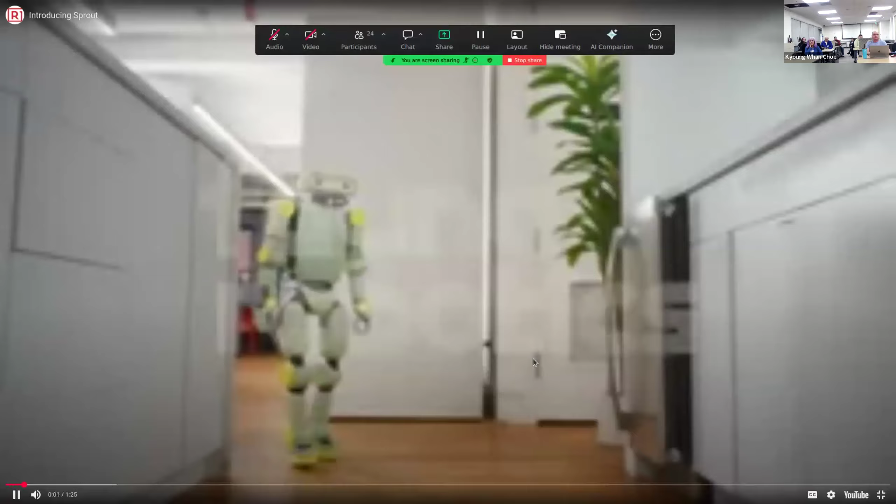It's running real slow and real low res. The robot walks slowly, and it is a low res robot.

But this is Sprout, this is Sprout, okay? You can get one of these. They say they're on sale as of yesterday for $50K. So there you go. But what do they do?

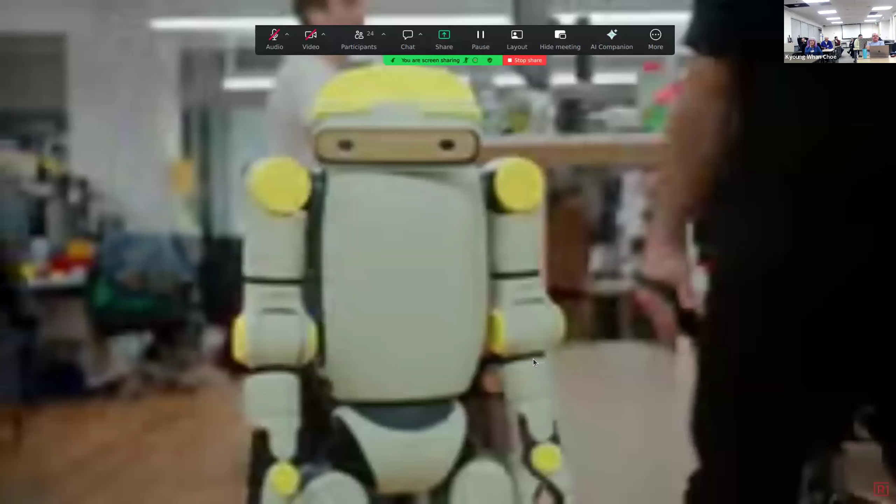Looks like a toy. Yeah. It holds your stickers.

They specifically said that they're setting it up for research labs and things like that. They also talk about the home, and they talked about it, which was kind of funny. I read an article where they were talking about hotels, and in particular, it delivering toothbrushes for some reason. But anyways, there's that, okay, let's move on.

Let's see, we're still - what is it, the Wuji hand? Is that the question? Do you guys see the Wuji hand? Are you sharing your screen? I will share it here in a second, let me bring it up, and then I can go here and share this.

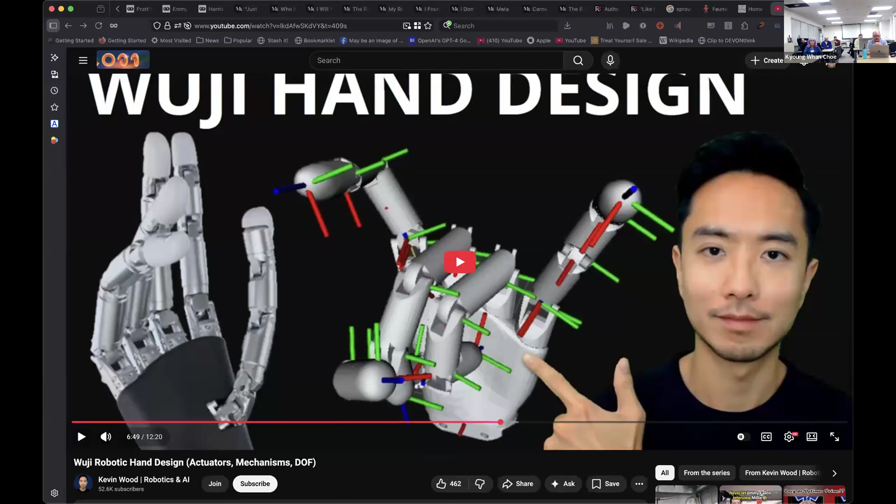So this has a worm gear here, and then you have... this is a new hand that was announced, and all the frames here show the different degrees of freedom. You can go ahead and actuate it here. Let me see if I can get a better view. This is their model of it.

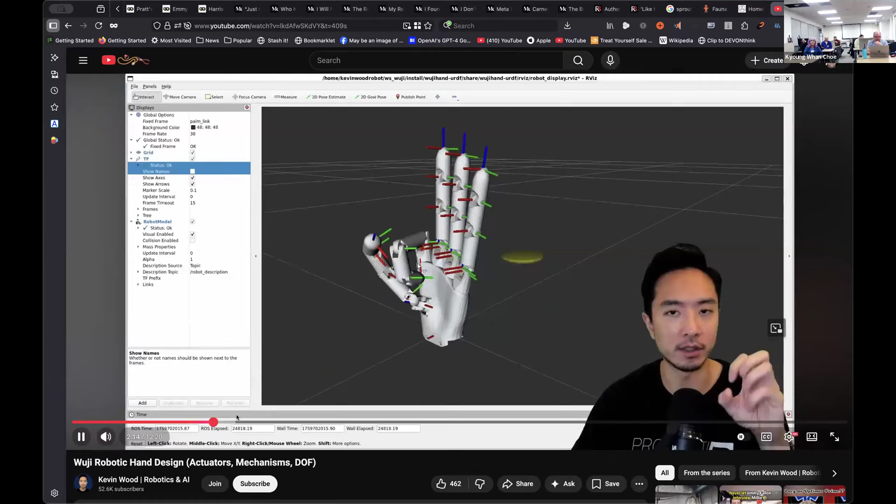This nice hand basically has a bunch of embedded motors. It's from a company that makes miniature embedded motors. And there's this 4-bar linkage here.

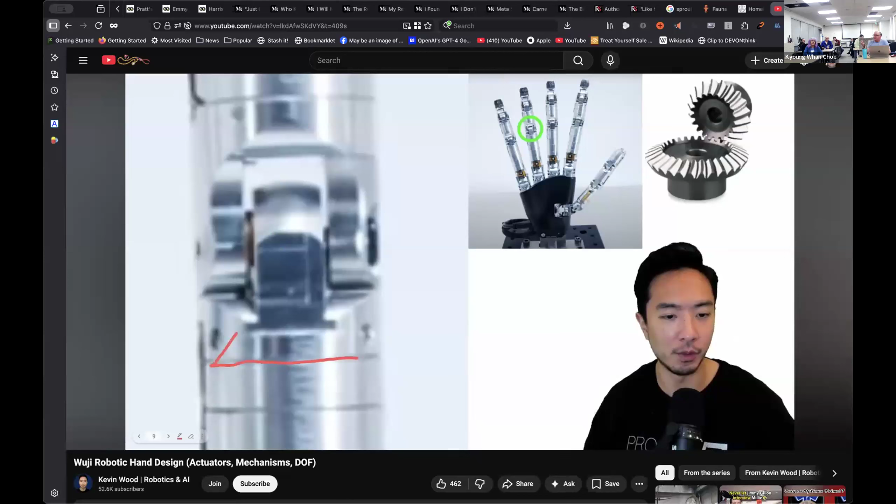So this is how it does it, which I'll show you a little bit. What's nice about it is it has, I think, 20 or 22 degrees of freedom. It actually has more for the joints covering the fingers than a human hand does, because in our hands some of our joints are coupled with tendons, and they have independent control of every joint, and can also do the splay individually of each finger.

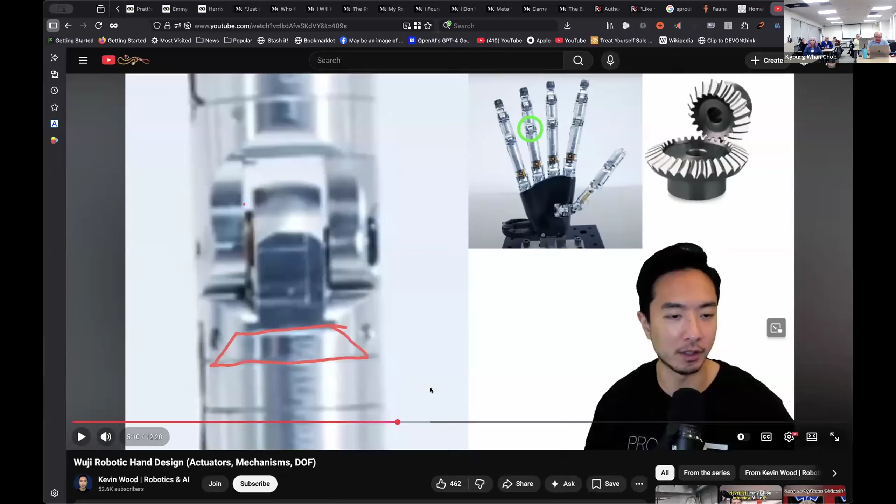So the clever thing is, one of the things they show is you can grip something heavy and then lift it up.

People are trying to discern exactly what the mechanism is in this, and the best conclusion I've seen is that basically they have a gear motor for each joint of the finger. The best guess is that they're doing a worm gear right at the joint, so basically the backside of the center post likely has a worm gear.

I bet it's got a hell of a grip. Yeah, so with the worm gear...

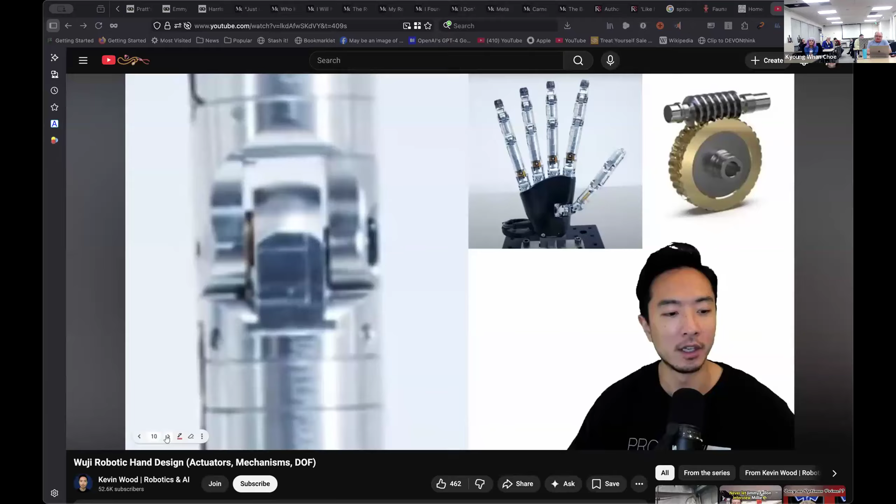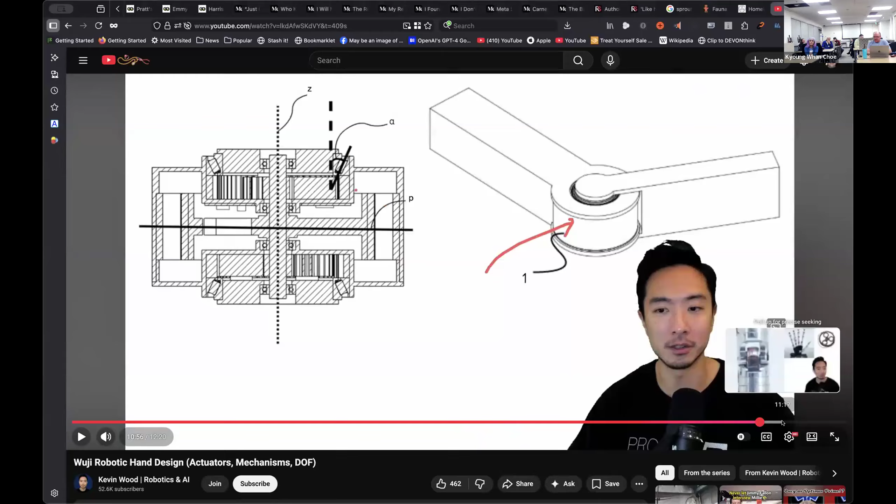Well, that's the thing, I don't think it's necessarily... they talk about it being relatively strong, but it's really strong once it has gripped something. Because it's using worm gears, that doesn't necessarily mean the fingers are strong enough to do that grip. In a different video they show it gripping a weight and picking it up - wrapping the fingers around it, they probably don't have a whole lot of strength, but once those fingers are in position, you can lift it up because the worm gears lock it in.

So I have a completely different mechanism, like a tendon-based mechanism, which is what I'm really interested in right now for humanoid hands. But I'm kind of tempted to try to build a cheap version of this design.

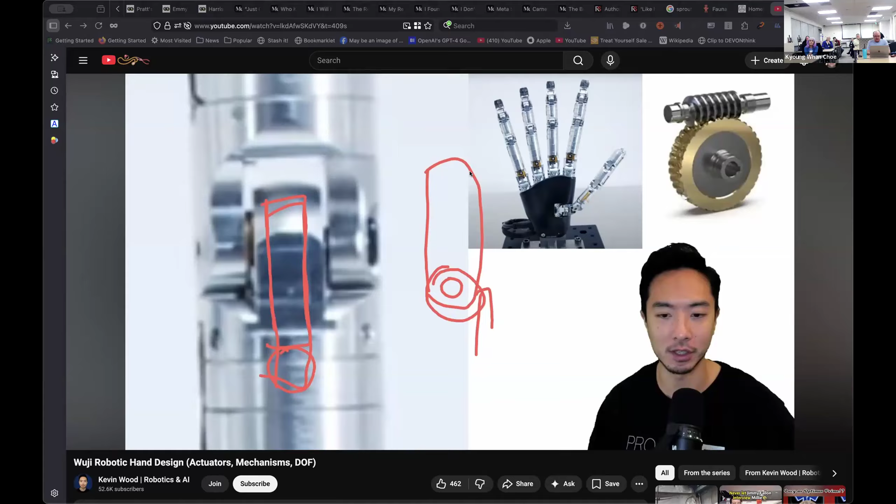Can you put that link in the chat, Stephen? I thought I did, but maybe not. Oh, I just shared so far. As soon as I stop sharing, I will put that in there.

Any other industry news?

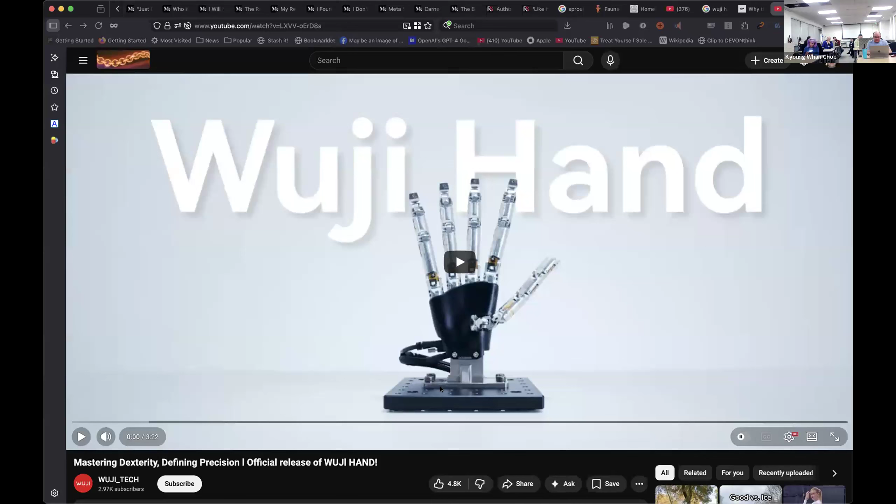ROS By-The-Bay is tomorrow night for anybody that also wants to go to that. We need to infiltrate that group, I want a homebrew presence. I went to ROS once, and it's all the people that used to come regularly here. Well, they've got our spot at Google. I remember when we were at Google. Those days are gone, but anyways, we can sneak back in there. When is it, Nathan? Tomorrow night at the Google facility. More robot stuff, did they do that? Did they do free pizza and beer, by the way?

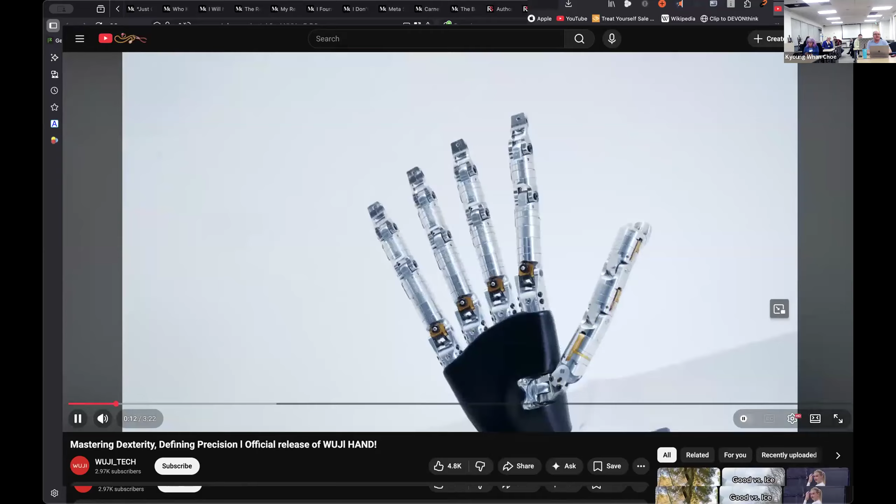Hey Cam, you're still sharing that video. I found the official video, that's Steven.

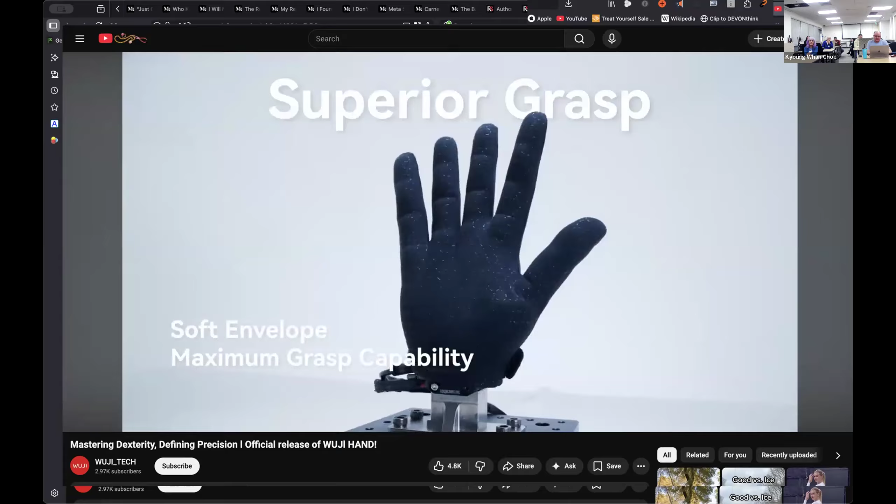It's a nice hand. I think I saw that they're quoting $5,500 for it. That's a lot better than I thought - I thought you said 50,000, but it's one less zero, 5,500. That's reasonable, for 10K you could have two hands.

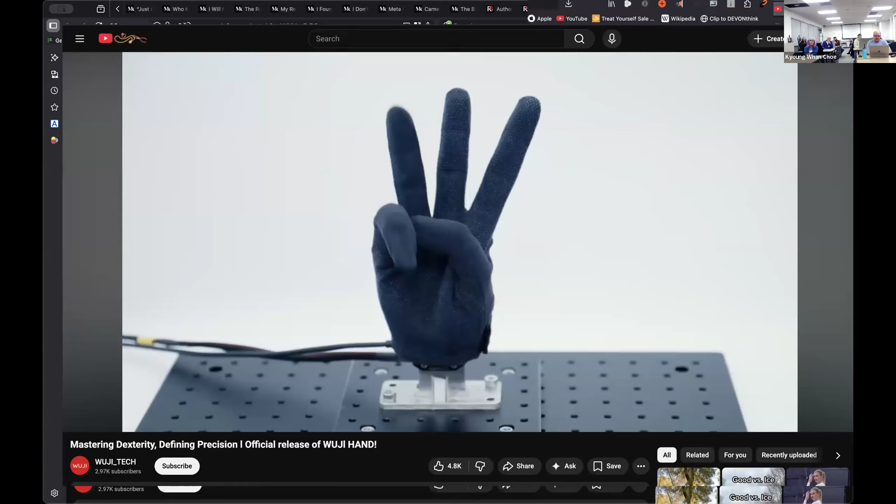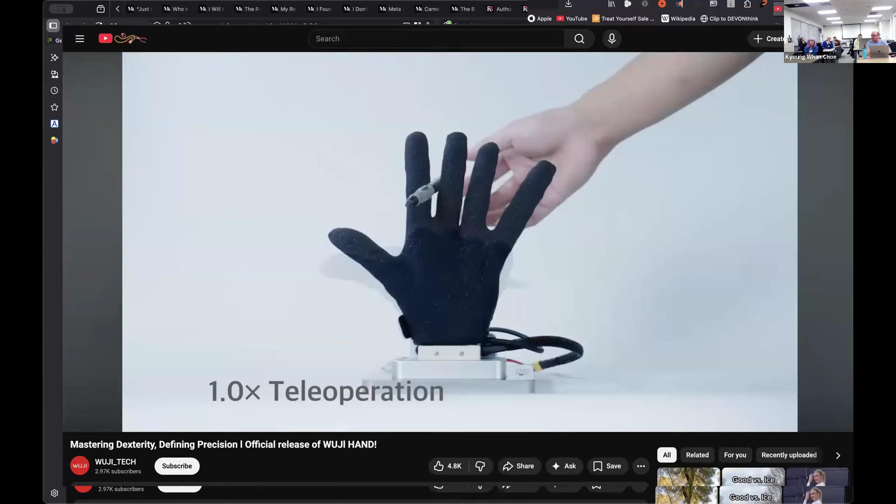People aren't clear if they're doing touch sensing and how. Some people are theorizing that it might have the touch sensors in the glove. If you put touch sensors in there, then prices are too cheap for that. Well, it depends on what you use, because I like using these new sensors that Bosch has - you could easily have a bunch of them. I'm trying to remember the price, I'll have to look it up. They're $5 or less, I have to look up now.

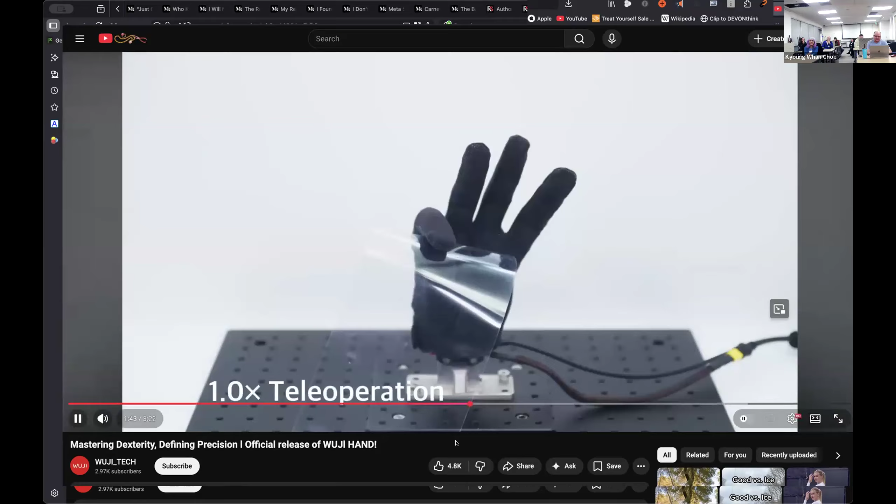So it's a pretty nice hand.

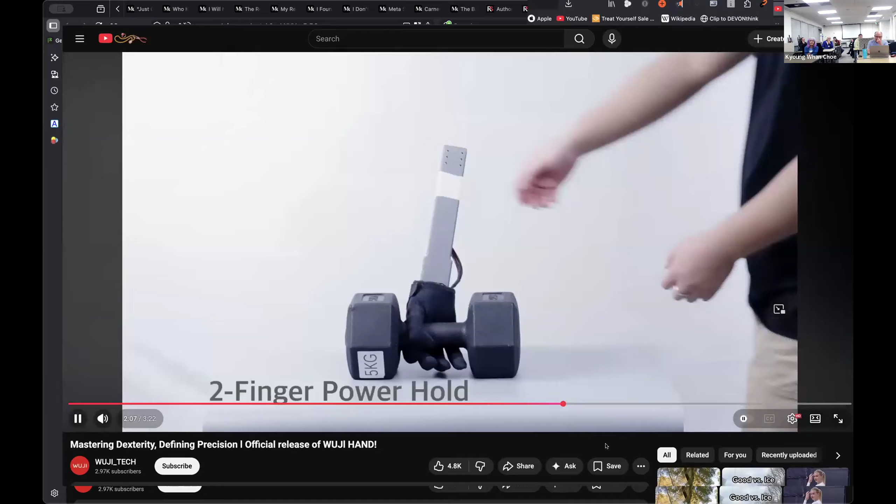Remember when Tony Canis did his summer internship where he had the PR2 fetch coffee for the professor? There was a whole back and forth where the robot had to understand how to hand the cashier the money, and when the cashier properly had the money, then the robot would let go of it. You don't think about that stuff, but it's the whole deal.

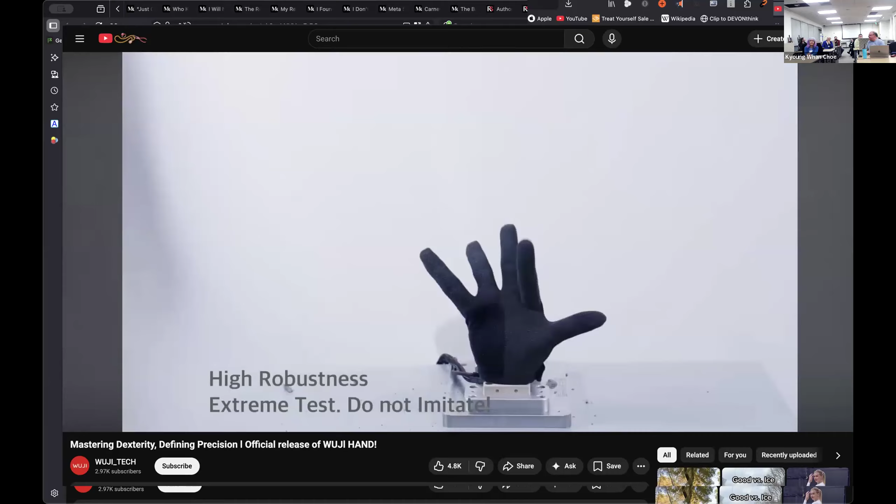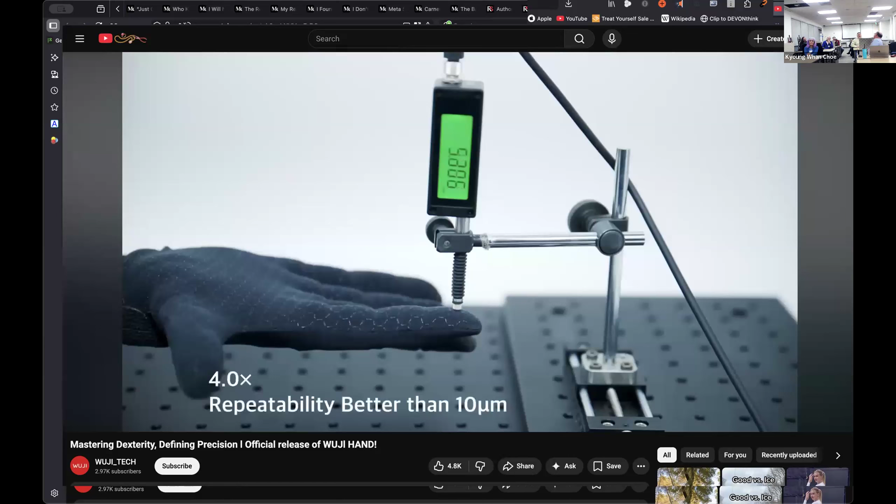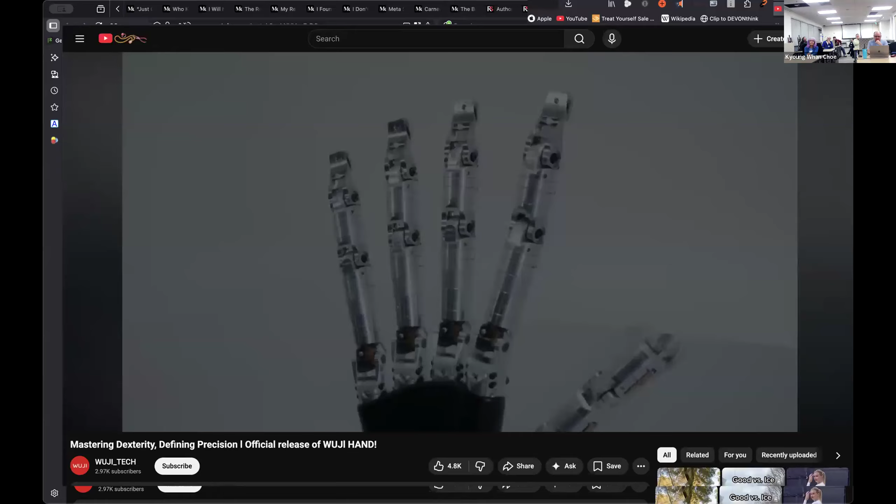So if you look at this, because I kind of looked at it a lot, there's one motor here controlling this joint. There's one motor here controlling this joint.

I don't know, can you see my screen?

And then there's a motor here controlling this joint. So this segment is unnaturally long because it has two motors in it. And then there's a motor here that's controlling the side to side joint. So they have it's interesting.

Oh no, I might have that wrong. This one here, I think, is controlling side to side. I know they did something where they reversed those. And all the fingers are the same length, but they start at a different place.

It's 50,000 per year. Very cool. No, this one is 5,500. That other one, Sharpa, I think, theirs was 50,000 per hand. So there is a $50,000 hand. They have particularly high-end sensors for each finger. That's where a lot of it is.

So, okay, stop sharing.

The big issue, of course, with all of this stuff is going to be the long-term reliability of those things. This has to have tiny little motors with tiny little gears that are then running the worm gear. The worm gear may last, but those little gears, you wouldn't think that they would last that long.

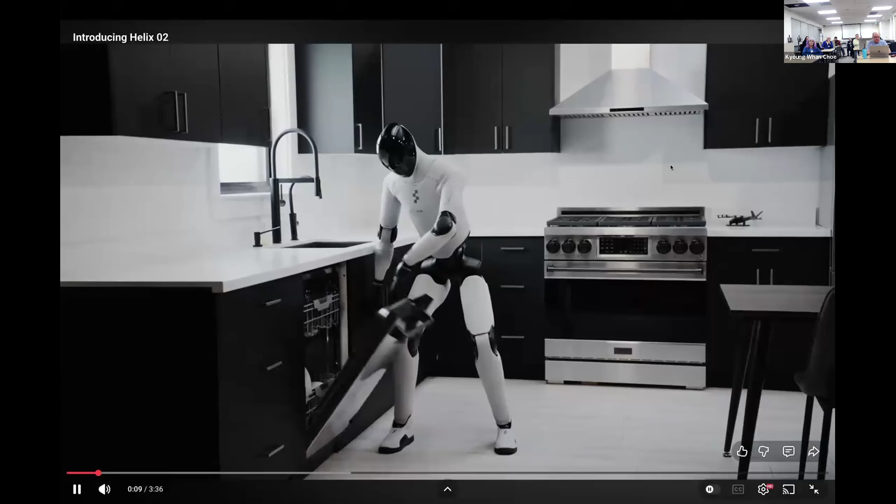Are they actually selling this yet? Only to enterprise, to BMW, but not to the public yet. There's not a price on it yet, in other words. And there's not a price.

You used to work at Boston Dynamics, did you not, Willie? Yeah, so I was there 2 years. I was full time for a part of it, but also part time while I was doing graduate school.

They had a new research - I don't know if you've heard of Boston Dynamics AI Institute, or RAI now it's called Robotics and AI Institute - but they are their like AI research arm. And I did some stuff on the dog.

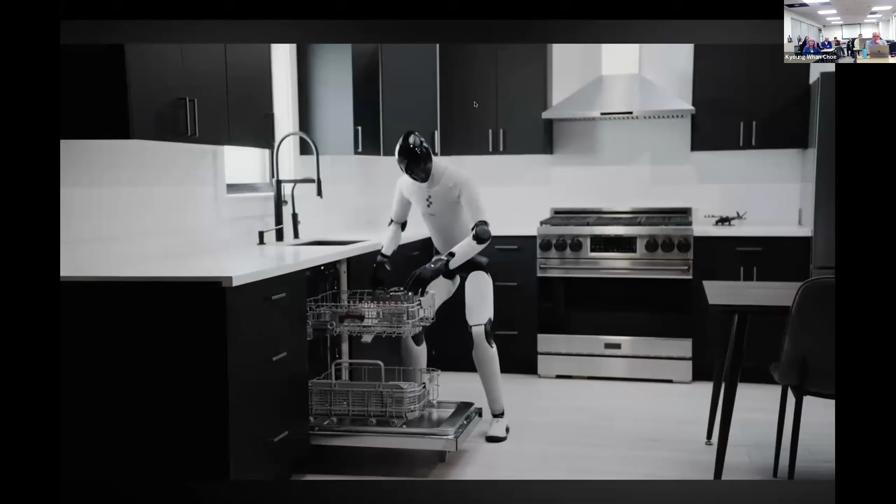Well, Hyundai owns Boston Dynamics now, do they not? Hyundai owns them, yeah. Everyone owned them. So Google, then SoftBank, and Google, then Hyundai owned them, yeah.

Yeah, the new Atlas is awesome. A lot of people who leave the lab go and work there. They're hiring a lot.

So you said this is fully automatic, this demo here? Fully automated demo, as far as I'm aware. Do they teach the robot where the dishes belong?

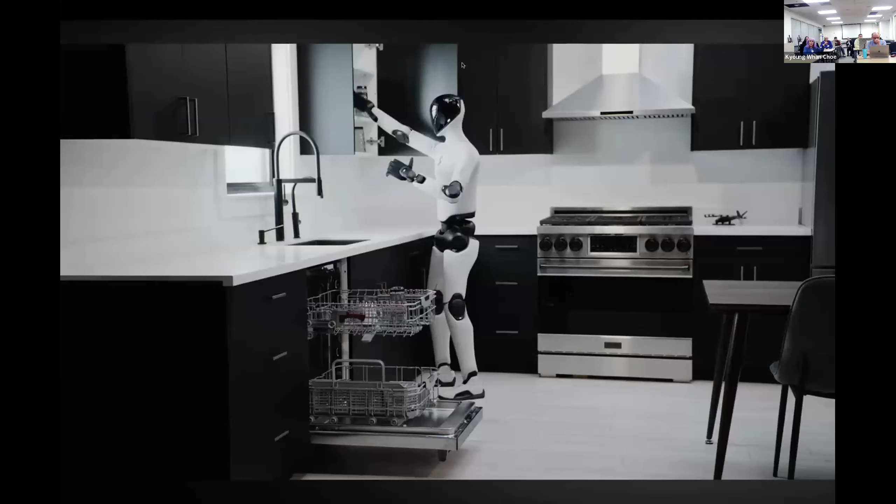A lot of data. As far as I know, they don't do any... actually I don't know, I would go into it, but object recognition is pretty typical. It is working.

So this is one of the standard VLA demos that all the robotic startups are doing.

So the training is probably done by pointing it out, or web scale data. And for the input, they either send in the language or just hope for the best. I'm not really sure, but probably web scale combined with text.

The big problem, of course, with web scale... what did you say, web scale?

Web scale data. I think Figure is actually using web scale data because they have a pre-trained vision language model, something trained on YouTube or similar. So that's part of it. But I'm guessing there's text in there doing it too. The Google ones are all web scale.

There's like 100 companies all making these models, and they all get basically the same performance. We don't know how many times they did that demo to record it, but it's pretty clear no one can get over 99% with these models now with pure VLA models.

Is this VLA - vision language action? Yeah, VLA. Thank you.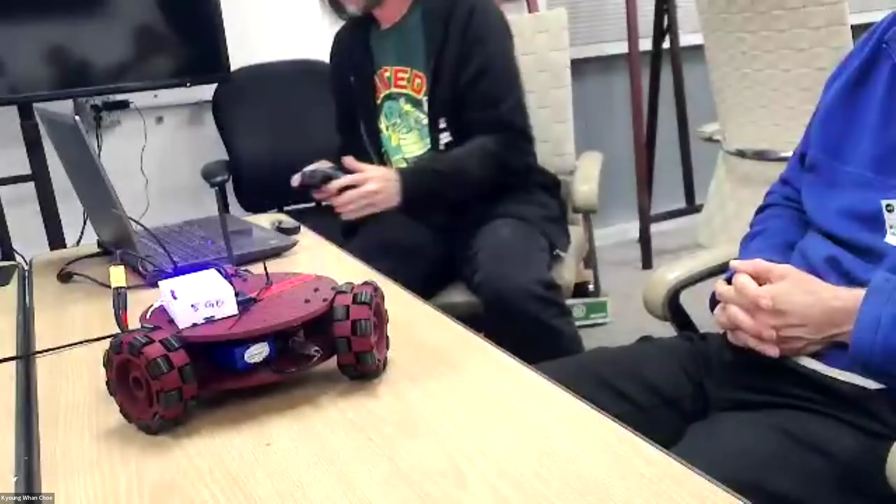So this is Teleop Twist keyboard, right? Yeah, with the holonomic wheels. Did you 3D print those? I 3D printed pretty much the base and the wheels. The arm printed, but my printer is a little bit too tight, so I have to rework all the bases for the servos. So that's slow going.

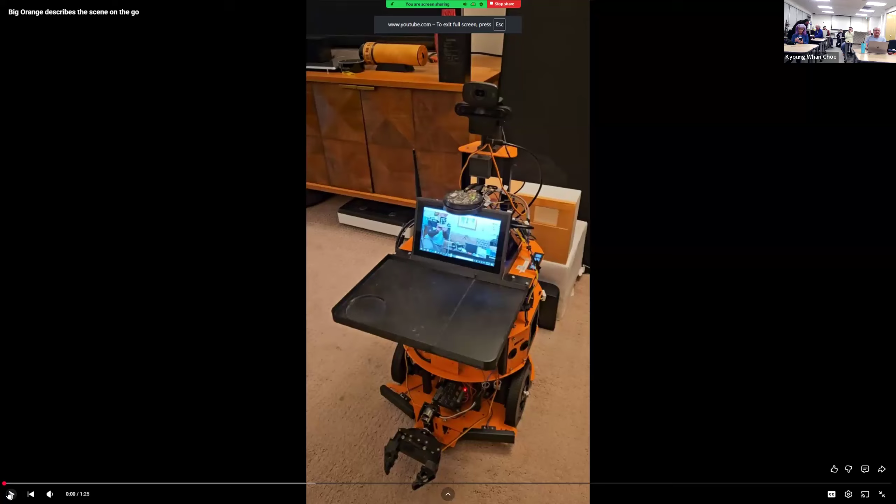So I posted a bunch of shorts, if you go to my YouTube, the various things like Big Orange comes over to me, Big Orange searches the room. These are all controlled by my brain, now controlled by AI. So here's one where Big Orange is using the Nano VLM, not VLA, VLM, vision language model, and it can get frames and describe what's in the frame in real time using Jetson Nano. Of course, you can't speak every frame in real time, so it has to just take a frame, talk about it, and then do it again.

Going to the hall, describe what you see, and then come back. First, I'll go to the hall and describe what I see. Then I'll return here afterward. Let's get started.

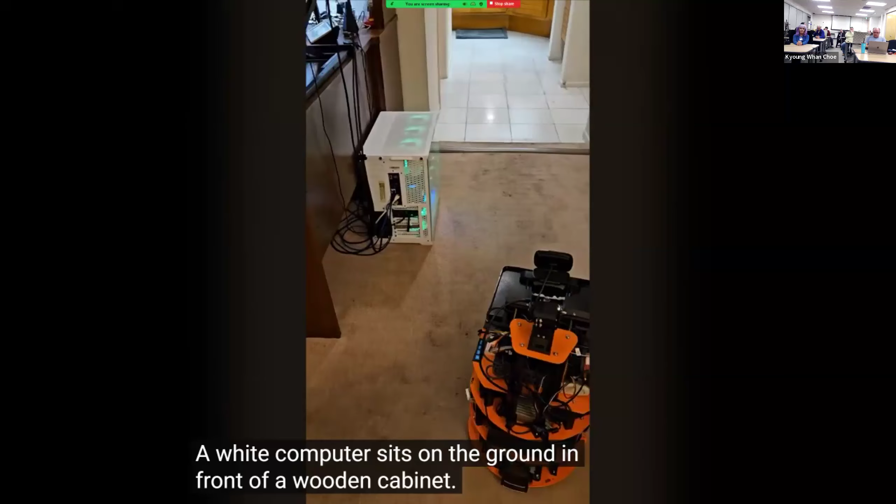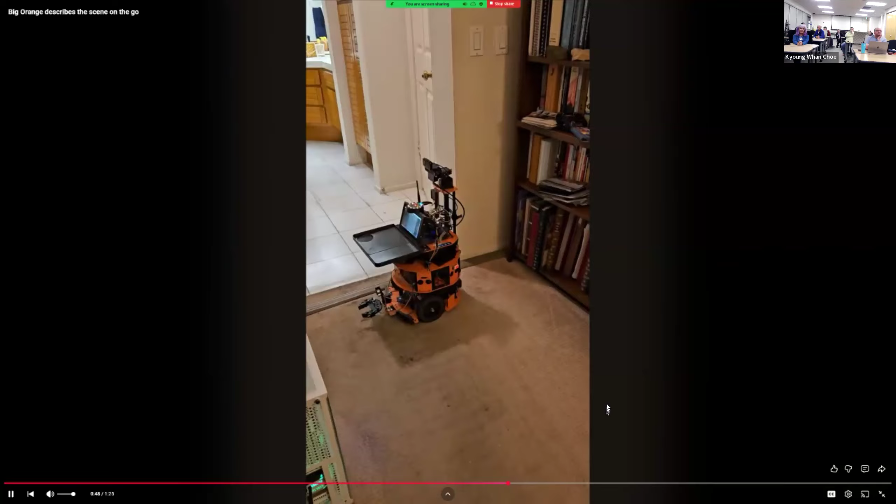A white computer sits on the ground in front of a wooden cabinet. The scene is a bathroom with a mirror on the wall. The image shows a bathroom with a wooden vanity. Now I'll head back home and describe what I see as I go. The image is blurry and shows a person standing in front of a counter. The scene is a cluttered room with a television, a microwave, and a couple of chairs. The scene shows a wooden table with a television on top. The scene shows a cluttered desk with a computer monitor, a television, and a wooden file cabinet. On my way back home, I see a living room with a tan couch. Task complete. Let me know if there's something else you'd like me to do.

So what AI are you using for this, Jim? So this is running on...

Flight 2185 service to Hayfield, gate 22. Looking for Miss Reinhardt.

Hey Cam, your audio is overrunning everybody else's audio with those. Where is that coming from? He's in the airport. Oh, yeah, you might want to mute. Use the space bar to talk, and you can mute.

That's the standard way, but so this is what I'm doing here is using these models that were made for the Jetson Nano, and you can go to the NVIDIA website here called the Jetson AI Lab. Can you see this? This is the one I'm partially showing, called Nano VLM. It uses LLaVA, it's using...

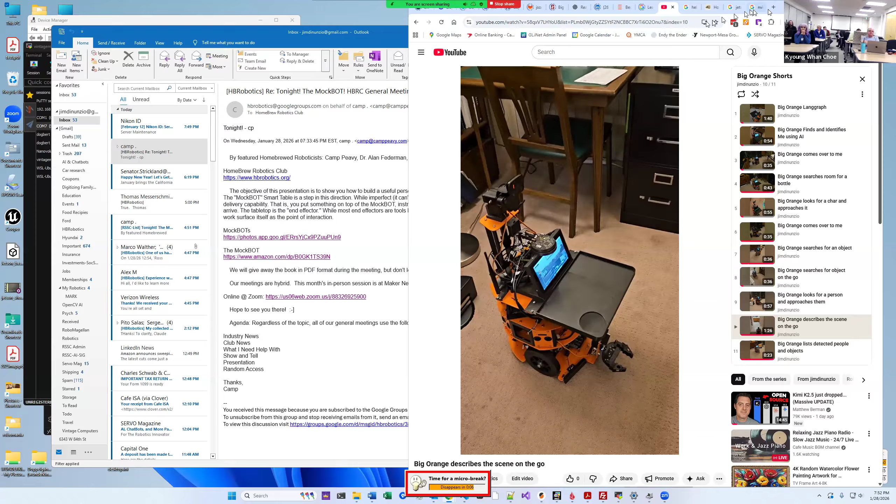I've tied in what's called LangGraph to control all these features of the Orange, providing tools and feedback from the Nano VLM, which is like a tool, and the AI connects all these activities together. I'm giving control over to AI of all the things I've done with Orange over the years, now converted to tools that the AI model can access at will. It takes your language, converts it to actions, and then gives responses, voice responses and text responses which are read out as voice. I'll give you an update next time.

Yeah, the Big Orange chassis is still available. It's kind of an old design pancake robot, but you can still buy that chassis. It's got big wheels that make it easily traverse carpet and floor. It can stumble over a large wire protector on the floor, but otherwise it handles carpet and regular hard floor pretty well. That was about $600, $500-something dollars. But it's sort of an old design, that orange thing, and it's low to the ground.

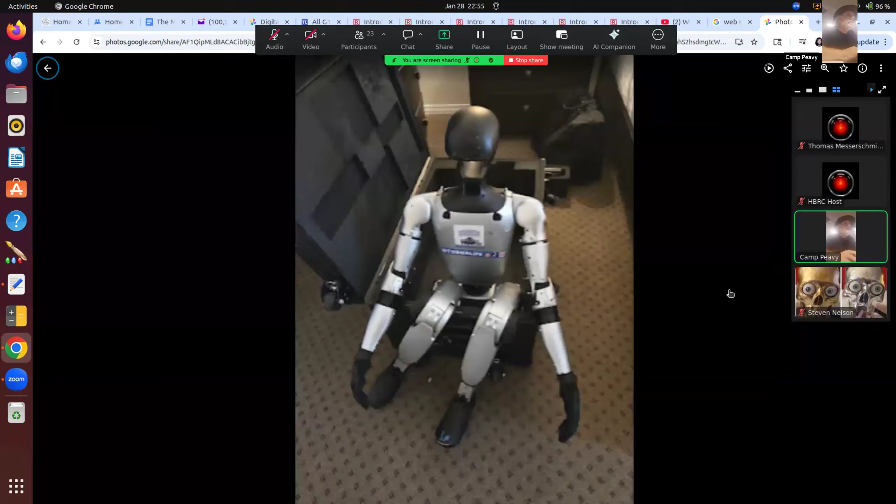This is the G1 robot, we call him Greg. Luggage and parking, let's use that at all times. Do not see your luggage and parking. I walked him around in the hotel. That's always fun. I can't do this.

Anyways, this is part of the presentation. They did a Top Gun thing, this is their guy. This guy did a little presentation on quantum computing. There's actually some quantum computing in their data banks, or their data centers, so they're using some quantum computing. He was talking about the scale, the levels of it. You were saying hundred thousand, million, blah blah blah, and he was saying they were at the thousand level, however they calculate quantum computing.

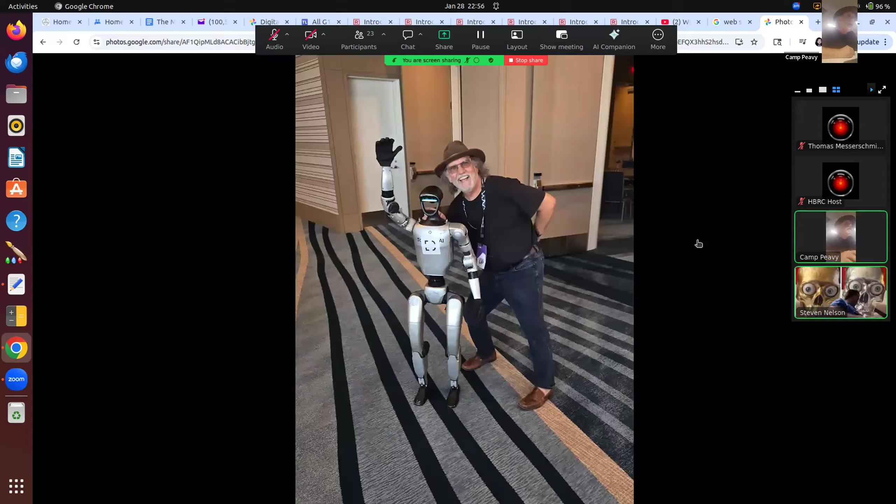So this is Greg walking down the hallway here, as soon as my video catches up. I had a lot of fun because the case was broken and I couldn't wheel him, so I had to put him in the car, walk him into the hotel and walk him out. I was walking him everywhere, it was awesome, people looking and waving and stuff like that.

Yeah, so that's what I've done earlier this week. Is there any other show and tell?

All right, let's go ahead, did you use the robot to use the high occupancy lanes? Yeah, I could have. There's one other thing, let me share this.

Patience is a virtue.

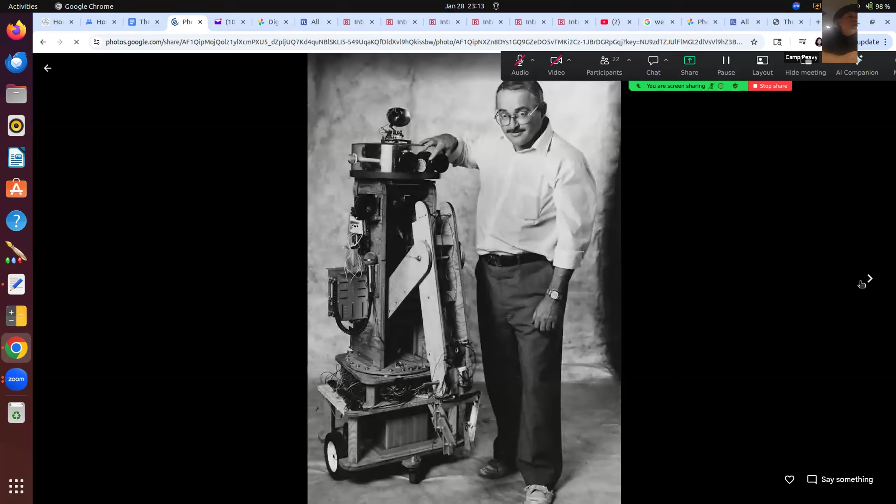So here's something interesting, the early HBRC. This is Dick Prather. He was the original president of the Homebrew Robotics Club. He made a robot featured in the movie Creator with Peter O'Toole. Check out this movie, it's a good movie. This is the robot that Dick Prather made. There's Wayne Gramlich and Bill Benson.

Wayne had a robot that I think they called Wildcat or something. It was popular for a while, it chased like an orange ball. Actually, no, this is Chuck - that's not Wayne, but Chuck McManus. He was our second president, I believe. He had this robot, Wildcat I think it was called, that basically chased the ball around. It was funny because it hit the ball and it sprang off somewhere, and the robot would go chasing after it. Good times. That's early HBRC.

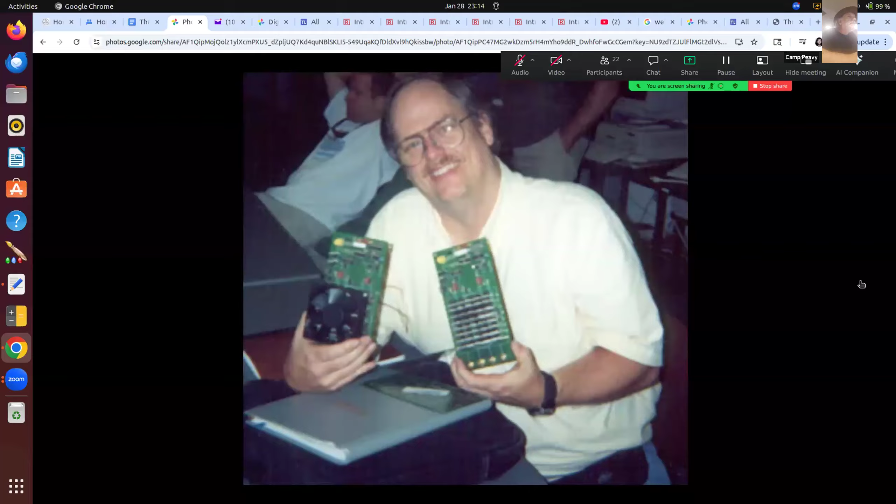Multiple parts to this project: create a ROS2 workstation, program and install ROS2 on the robot's controller, choose a robot base - either the Roomba, BotVac, or Create 3. Add the LiDAR and end effector, that's the tabletop. Add LiDAR camera and other sensors, then create a map and navigate. That's the goal here, mapping and navigate. After accomplishing these steps, you're on your way to total world domination.

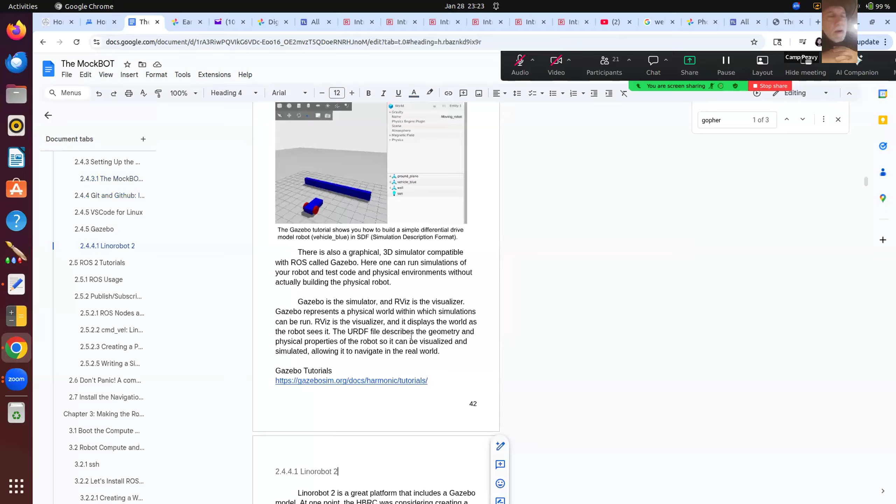Some time ago, we were talking about a standard ROS-based robot, and there were a lot of emails and links floating around, and we kept coming back to this Linorobot. My thought was that if we were going to make a standard homebrew Linux, ROS-based robot, the Lino robot is what that should be. I'm having to talk over the announcement here, so there's a link to the Lino robot. Also, here's the ROS tutorials.

So we're getting into ROS tutorials now. One of the big starting things is something called Turtlesim. It gives you a virtual robot turtle.

And then you run teleop. Let me back up here a second. What you want to do is run the Turtlesim and the Turtle Teleop keyboard. So this is the Turtle sim node and the Turtle Teleop keyboard.

The Teleop keyboard is a publisher. Turtle sim is a subscriber. So when you publish from the Teleop keyboard, it publishes command vel messages. These are velocity messages, either linear or angular velocity messages. Linear is forward and backwards, and angular is clockwise, counterclockwise, or one wheel turning back and forth.

So the idea here in the ROS2 tutorial is you launch the sim, you launch Teleop keyboard. Now here's a few ROS commands. You can do node list, topic list, and then topic echo. If you ran node list, it would show you the ROS nodes that are running: Teleop Turtle, that's the Teleop, and Turtle Sim. Teleop again is the publisher, Turtle Sim is the subscriber.

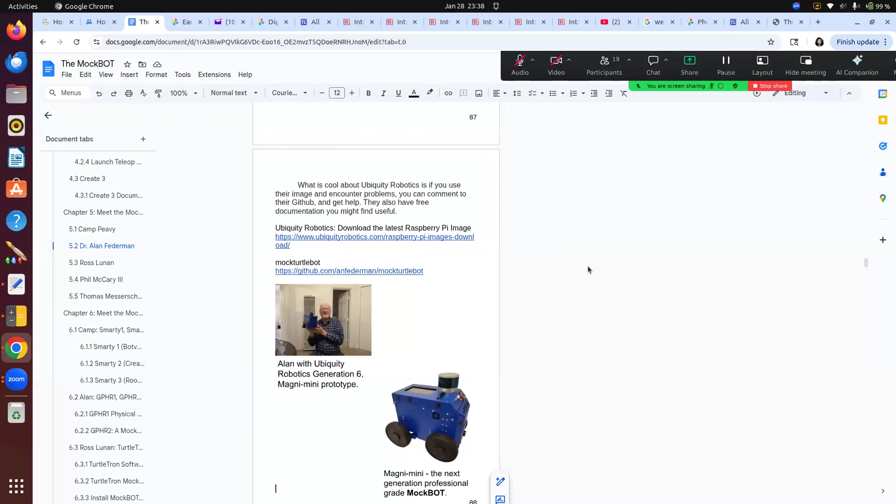Alan, I think you and I joined the Homebrew Robotics Club the same year, 1996, 30 years ago. No, I think you were there before me because the first time we met was in that library in Cupertino, or was it the middle school? I went to the homebrew club in 84, 85 when it was meeting at Alza with Dick Prather, and life got in the way and I got away from it. But when I was at the Robot Wars, Frank — I can't think of his last name — was there, and he says, 'Oh, you should go to the Homebrew Robotics Club.' And I told him, 'Oh, I used to go to that,' and that's when I went back. But you showed up shortly after that. It was like 96, I don't know if it was that early. It could have been. I started NASA in 95, and I didn't really get involved in robotics till it was like right around the same area, 97, 98. But anyway, who knows? Who can remember that far back?

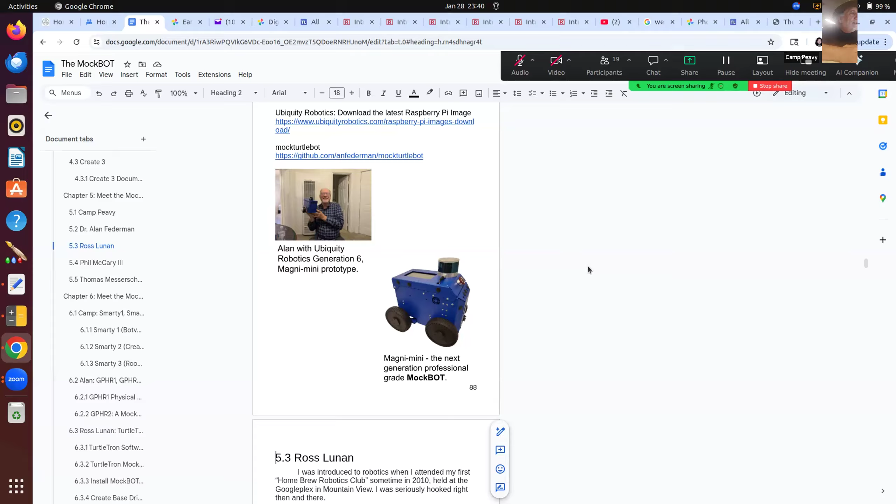Anyways, Ross Lunan, he's one of the mockers, and he's built the Turtletron, based on Create One, like the original Turtlebot. He's worked with Mike Wimble and Sergey, I believe, quite a bit, and we'll cover some of his robots later. But that's the Turtletron.

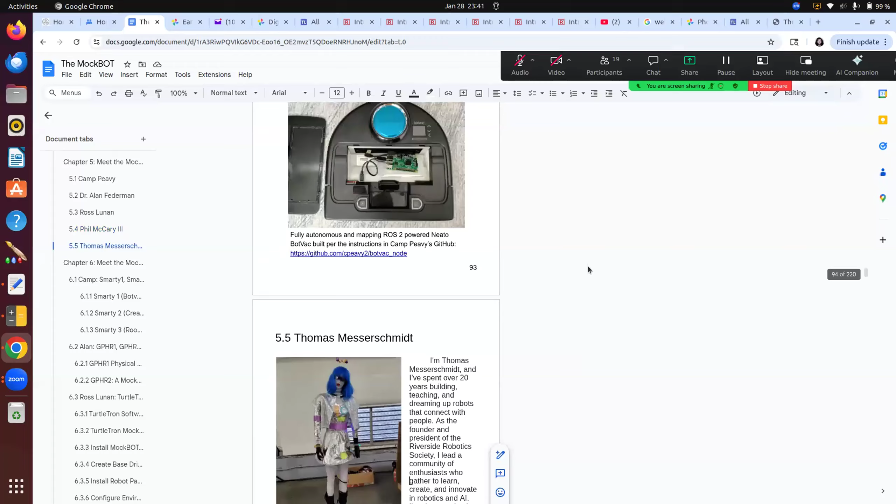Thomas, tell us about yourself. I told you I got the flu and a sore throat, so I can't say a lot, Camp. But yeah, I've been building the mock bot here, and my spin on it is I want to get as much AI working in it as possible. I'm still midway through — that's one of my robots. I like to build life-size humanoid robots. One of mine does walk, but most of them just ride on top of pedestals. That's it, Camp, I'm just under the weather here.

This is Alan. Interesting aside - my first Turtlebot was built from a Roomba that was donated to me by Melanie Wise.

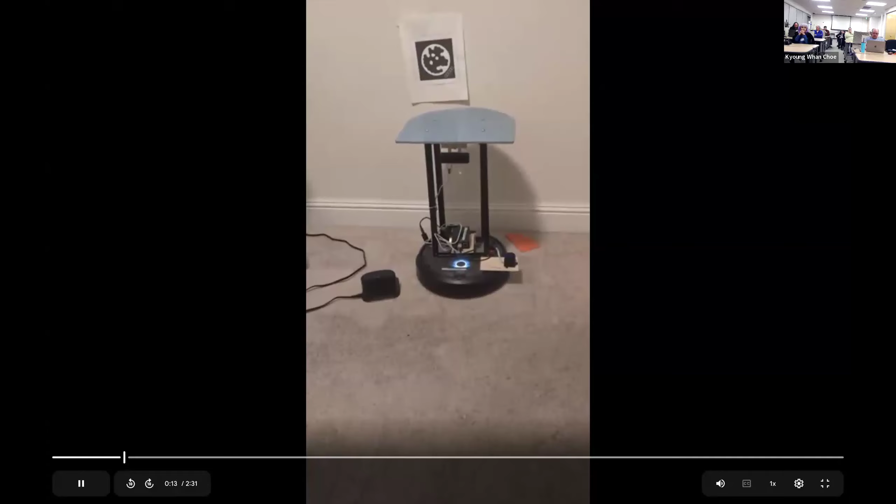I'm not hearing any sound though. Oh, the base - so there's a little computer in the bottom of the vacuum cleaner that's running ROS, and then there's a Raspberry Pi 4 on top. We have an Oak D Lite, an LD19. It's using a plywood table, and I think 2020 extrusions for the superstructure. So that's the physical robot, and that's the rendering of it.

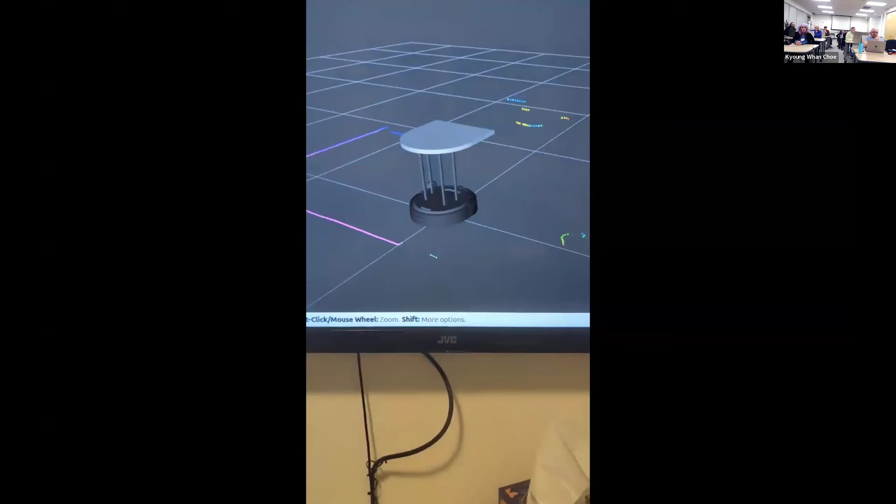URDF - you see the logo when you see that the camera is working. So I have a Logitech controller, and the benefit of the Logitech controller is that it has the dongle on the robot, so even if I lose network connectivity to the PC and couldn't do teleop, I can drive the robot with the joystick.

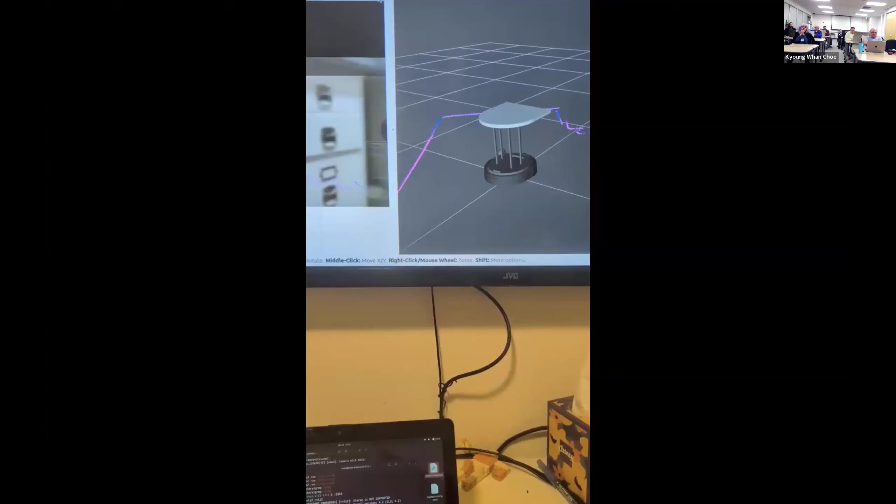You see, it's running around - that's my bot.

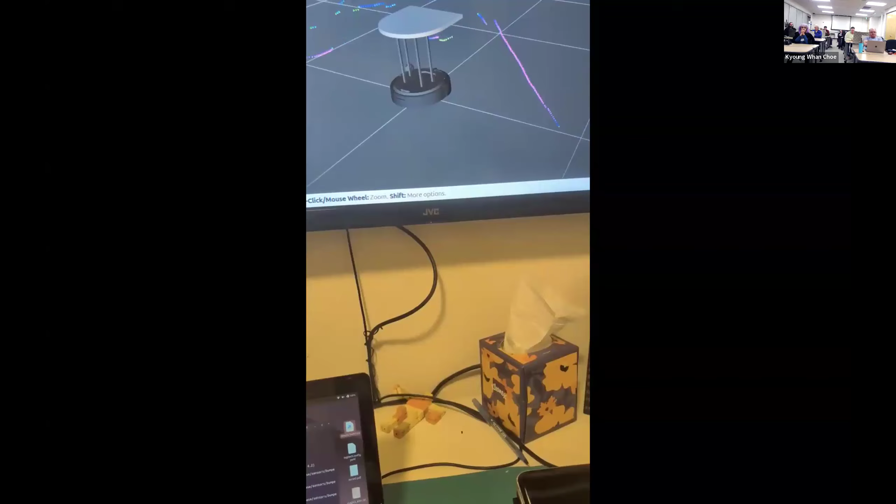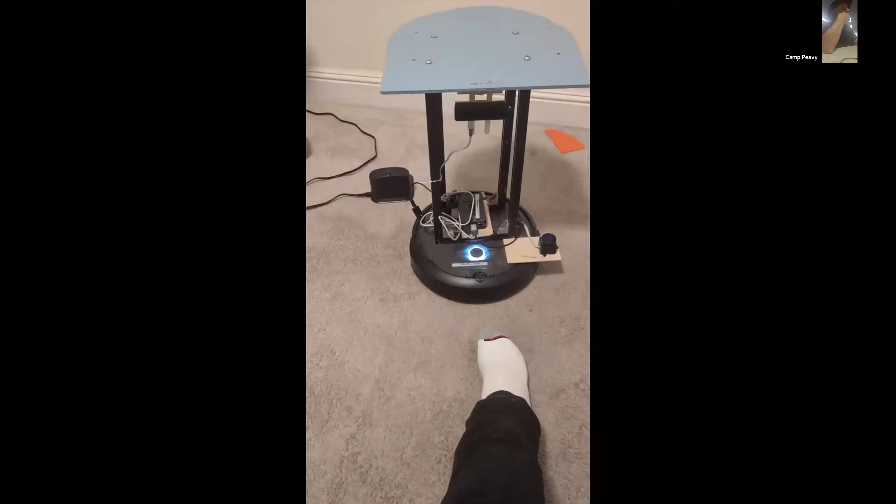Here's your robot, go back to where you came. And what's interesting, the bump sensor is working on this guy. Yeah.

So everything's fully functional. Fully armed and functional - everything's fully functional except the operator. Broken toe.

This was a really fun project, but as you can imagine, how long have I been working on this? About a year, 2.5 years. Well, the funny thing is you get to a point where you can still dot I's and cross T's. I could have spent another 2 weeks on it, but 2 weeks becomes 2 months, and 2 months becomes a year. So, anyways, let's get through this.

Here's Ross's Turtletron, okay? He's done a more siloed approach where he's making launch files that launch everything at once. Mine is more component-based, where you launch the base, the LiDAR, the camera separately, but he's kind of put it all together. I think he's worked with Mike Wimble and Sergey on this - this is the Turtletron, and here's his cheat sheet telling how he's done it and how he's operating it. We're not going to read it, are we?

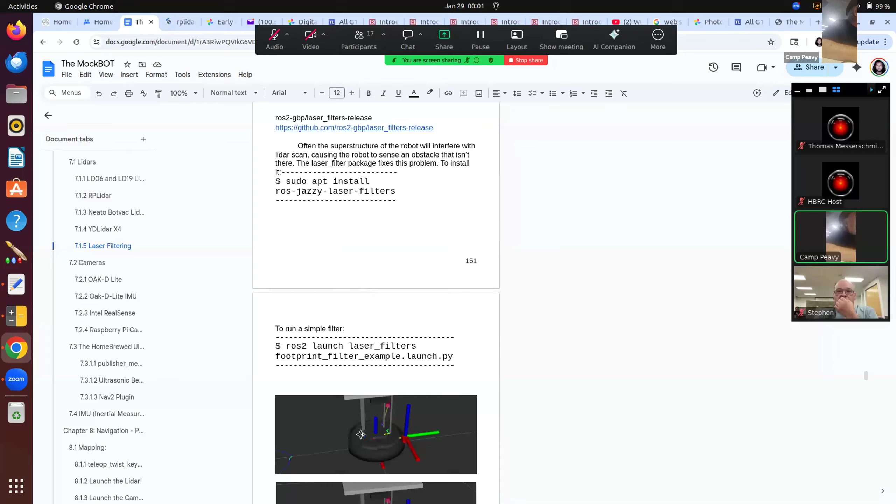Cameras, we got the OAK-D Lite, the Picam, and the Logitech camera. This is another key part of the project.

Again, I think the big takeaways from the project are the base laser transforms, this homebrewed ultrasonic sensor, and also the Mockbot URDF. Those are the big deals. So here comes the homebrew ultrasonic sensor.

Now, on this one, I found out that it too does not work on Jazzy, so I backed it up. My suggestion is dedicate a Pi to it and put Humble on it. This talks about in the Raspberry Pi imager, you choose Ubuntu 2204 instead of 2404, and then install Humble instead of Jazzy.

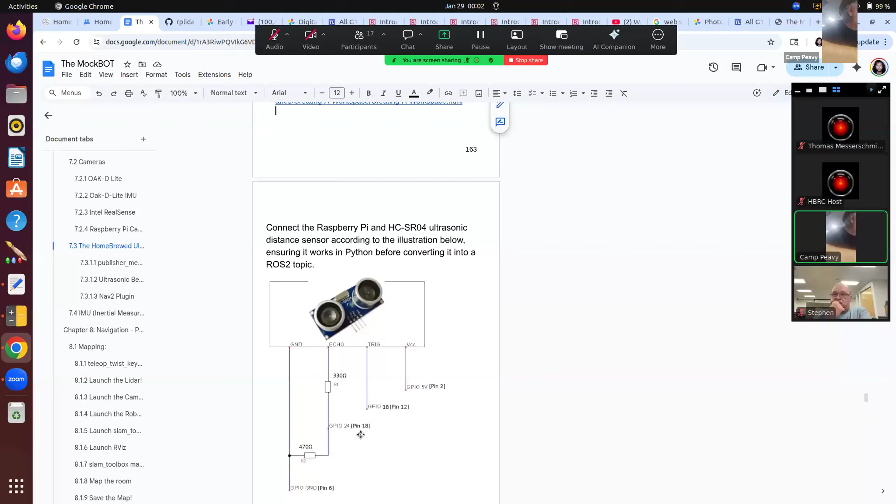But here's the connection to the ultrasonic sensor. And there you do the ping, or the measurement, with Python. Then we modified the simple publisher so that it becomes a range publisher. This talks you through pasting that code in place of the 'hello world' simple text, so it becomes a range topic publisher.

This is the code with the change. It shows the change, and again we had to shorten it up to 1.4 meters instead of 12 meters. This is the code for the navigation YAML. You've got to plug that into the navigation YAML—yet another markup language. Yeah, that's the homebrewed ultrasonic sensor.

Here's a little bit about IMUs. Finally, navigation—putting it all together, okay?

So the first thing is mapping, okay? So I always start the teleop keyboard first.

Let me let the screen catch up. Patience is a virtue.

Okay, so teleop keyboard, then you launch your base, whether you're running a Roomba, BotVac, or Create 3. You launch the base software—again with Create 3 you just switch it on and it's running ROS 2. Then you launch the LiDAR. Then you launch the camera. And then you launch the Mockbot URDF. Then you launch Slam Toolbox and RViz, the visualizer.

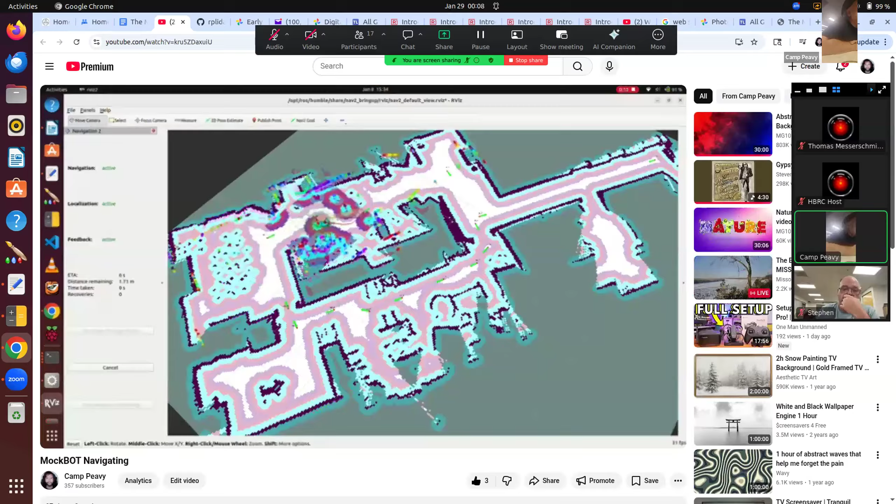This is a physical robot navigating around the house. You see the MockBOT URDF went over a floor transition. You can see when it rocks, it hits the floor. This is a regular Roomba, LD06 LiDAR, homebrewed ultrasonic ROS 2 sensor.

So here he's going to go to the end of the hallway. There's a hard floor transition here. You'll see him bump. See that? That's a bump.

Camp, can you wrap up in 5 minutes? That's fine, we're closing, I'm closing down now.

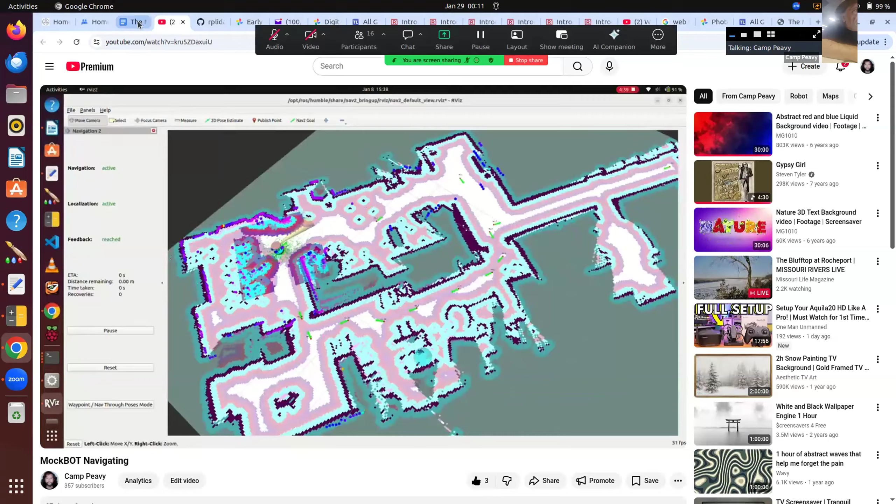2-3 days now. Looking forward: making robots more human, explore and lifelong mapping, GPS, fiducials, artificial intelligence. Thomas has got some good stuff here on AI with the mockbot. And then finally, tips and troubleshooting.

And that's it. Questions?

Did we have fun? Yep. All right.